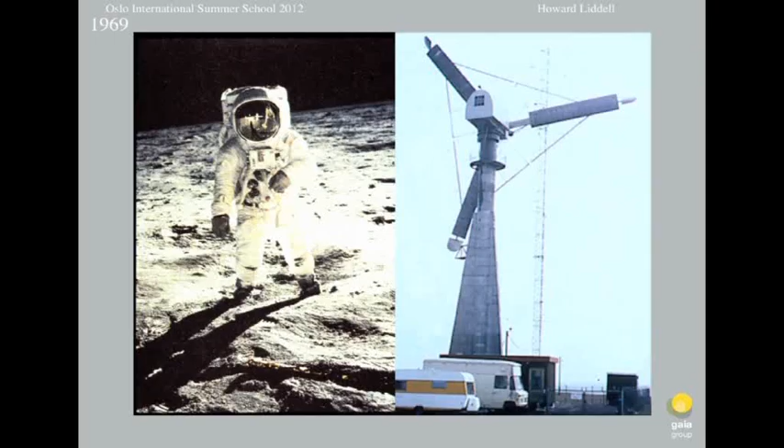If we start back in '69 with man on the moon, a great future was foreseen for space travel. The space people were in the big offices, and somewhere down in the basement was somebody doing wind turbines. The future of the world was definitely in outer space rather than inner space. This is actually the Gedser mill, one of the first major grid-connected mills, at the south end of Denmark.

And here we are in 2012, and what has actually happened is no men on the moon and millions of wind turbines. So the future's turned out somewhat different from the way it was foreseen in the days of Dan Dare and the Eagle comics of the 60s.

We are in fact in a much more earthed world as opposed to a space-borne world. In those days, as I explained in my previous session, we were zooming out to do stuff. We had this global perception of the world in crisis, and we were going out making these.

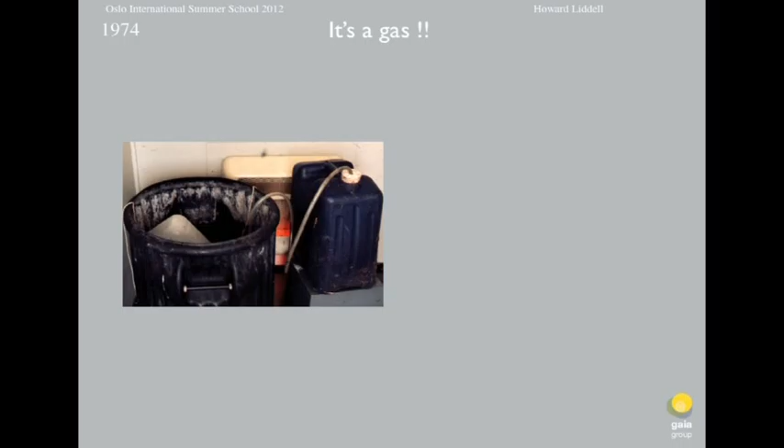These are all solar collectors and bits of kit that my students and I were making in Hull in the 70s. We were even using goat shit to try and make methane. In this tub on the left is goat shit, and the gas coming off is bubbled underneath into another bottle.

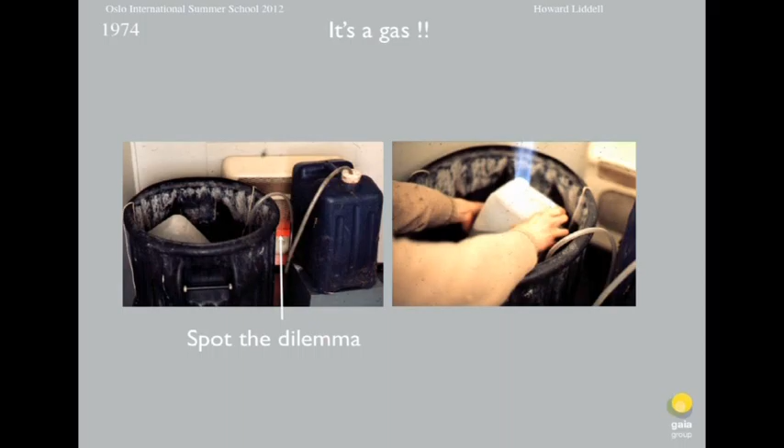Just to prove that methane comes off, there we are, we've burnt it. Isn't that wonderful? Except for one little problem - spot the dilemma. In order to keep the goat shit at the right temperature to generate methane, we had to put it next to a gas fire. So unless you actually want to engage in shoveling loads of goat shit, it's really an exercise in redundancy.

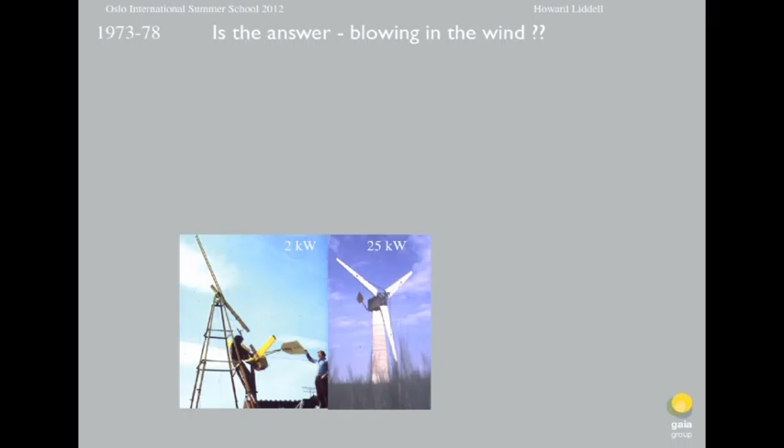A skinny version of me there, down on the bottom left, putting a wind turbine on the roof of our office in Hull, which actually generated just about enough to boil a kettle. An awful lot of effort for very little return, and that is one of the problems of micro turbines.

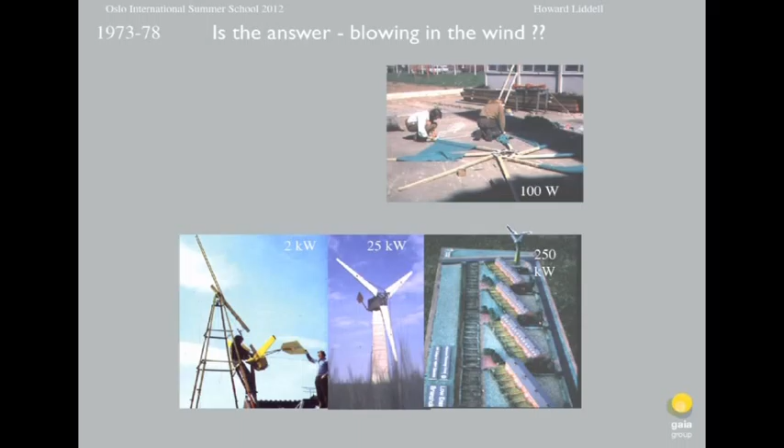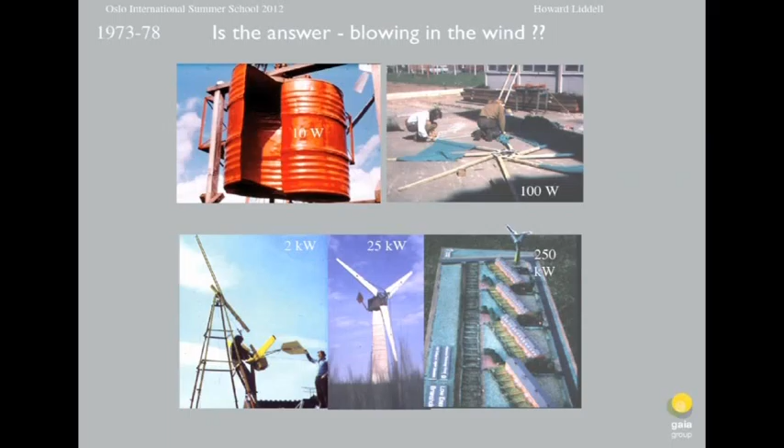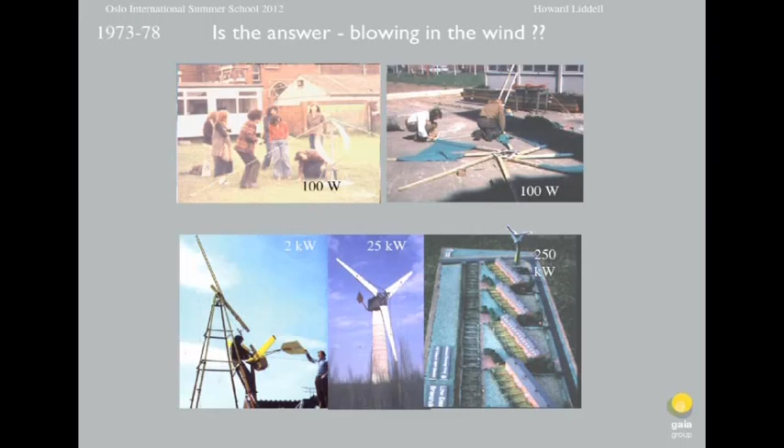But we built them - we built ones that were Cretan mills. We even had a project with a 250 kilowatt mill for a housing project in Hull, and then crazy stuff like the sawn-off oil barrel that generates all of 10 watts. The architect's favourite, the vertical axis windmill, because it looks sexy but actually doesn't work very well. So through the 70s we were doing lots of these things with all the pioneers of the industry at the time.

Now, wind forward a little bit. In the middle of all that, we were approached by Granada Television to get involved in a programme for refurbishing an old barn into an eco house. The architect was actually from Manchester, and we were there as what you might call academic support, talking through how we might get involved.

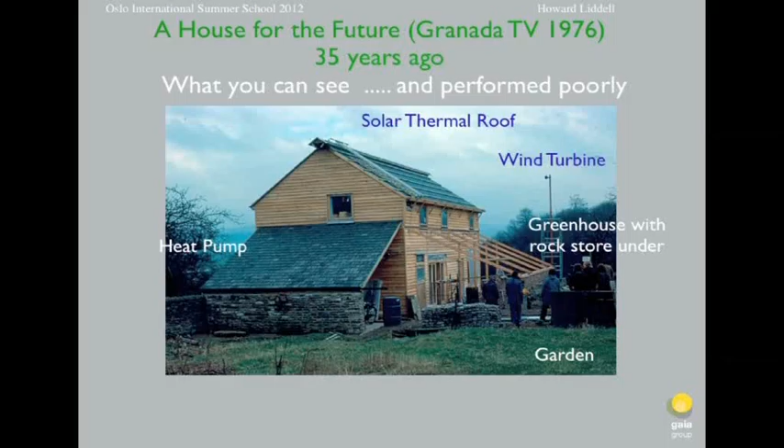All actually performed poorly. We went back to this project a year later and discovered that, in fact, the things that were working well were the things that you couldn't see: the high insulation, the draft-proof layer, and the kitchen heat recovery. Low-embodied materials also made a good score.

We learned then in '76 that what you can see doesn't always perform well, and what you can't see very often does. Therein lies the trick: if you want your green badges to show, you may actually not be successful. If you want them to be subtle, they may well be a lot more successful than you'd anticipated.

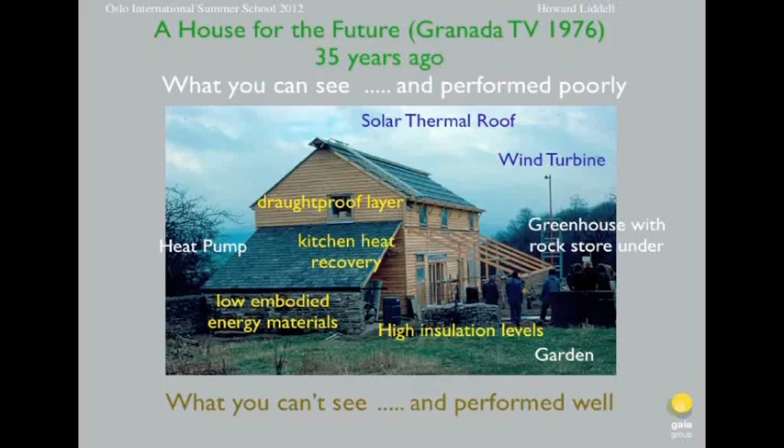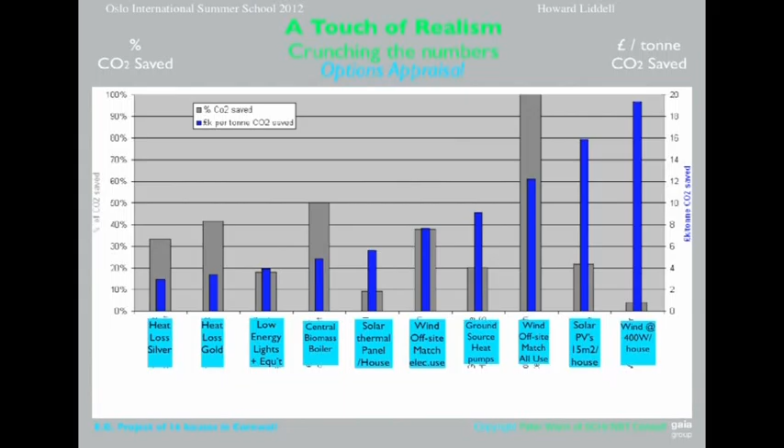What is amazing to me is that people don't actually crunch the numbers. I'm going to show you a project here where somebody did crunch the numbers for a project in England, a guy called Peter Warm, who looked at a single project and all the options.

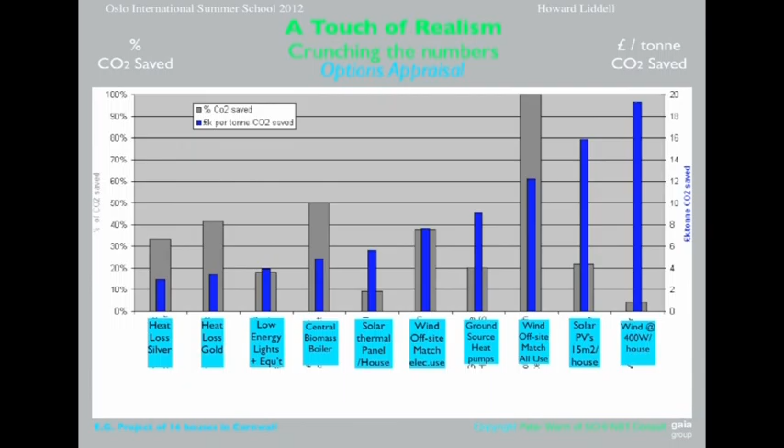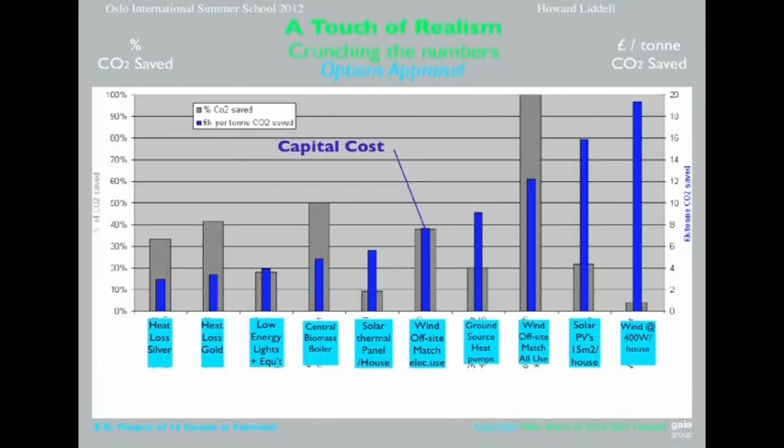On the left-hand side, getting the heat loss down to a silver standard, a gold standard, looking at low energy light fittings and so on, up to the far end where he was looking at micro turbines and then larger scale stuff. What we have here is a capital cost, the blue lines - the cost of any intervention proposed for this house in terms of pounds per tonne of CO2 saved. That's the investment cost to save money and carbon, and then the revenue benefit that comes from having spent that money.

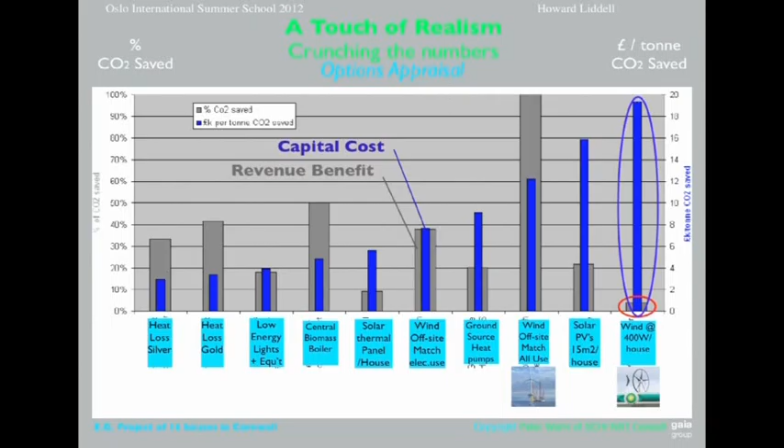If you look at the very right-hand side, what we have is a 400-watt micro turbine, which has a huge investment cost in terms of the tons of CO2 saved, and the output is tiny. If we look at the opposite, putting the turbine where the wind is, on top of a windy hill, what we get back is 20 times as much.

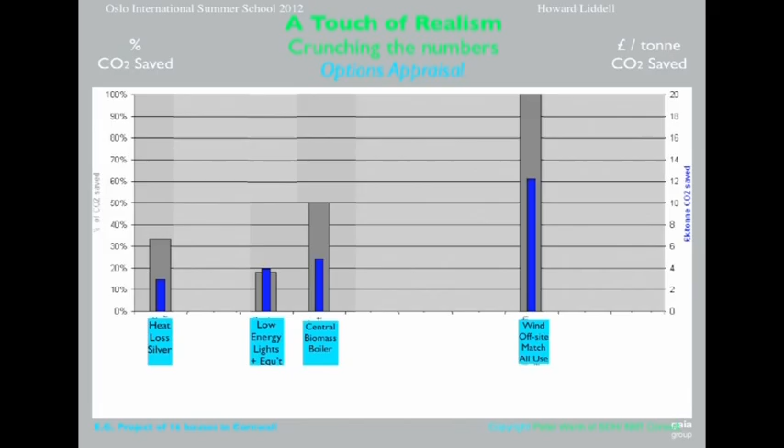That's perfectly obvious to anybody who thinks about it. We tend to place houses where there isn't any wind because we want to be sheltered. So it's pretty obvious that a turbine on top of something in a sheltered place isn't going to perform well, and indeed that's what happened. On the basis of crunching the numbers, certain things dropped out altogether as unviable, and others came on as very viable. So finally, through proper calculation, it was possible to decide what to go for.

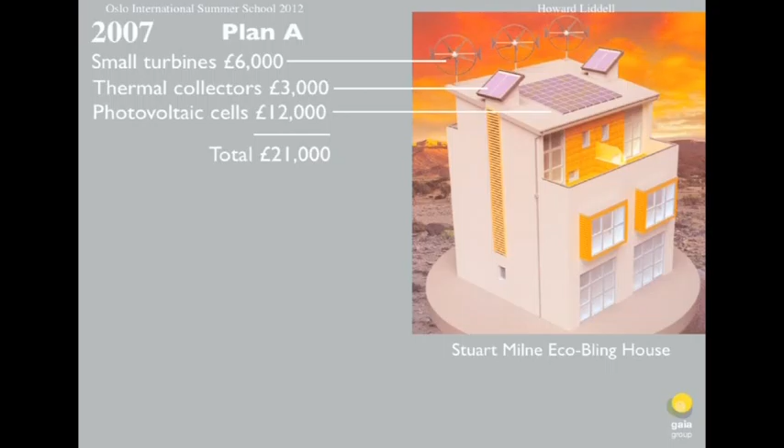Now, those who cannot learn from history are doomed to repeat it. So there we are in '67, and 40 years later, along comes a company called Stuart Milne, and they decide to make a house with small turbines on the roof, thermal collectors on the roof, photovoltaic collectors on the roof. They were going to spend an extra £21,000 to put all this kit on the roof. The payback period for that is about 100 years. The life expectancy of the technology is about 20 years. So I don't know what you think, but my view is that's not a very good investment.

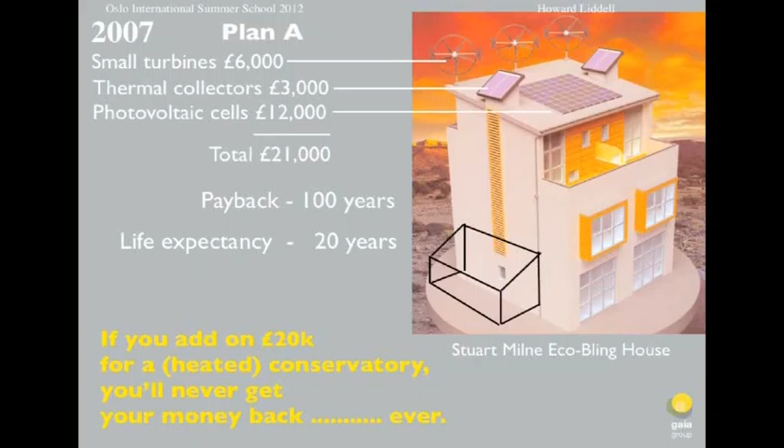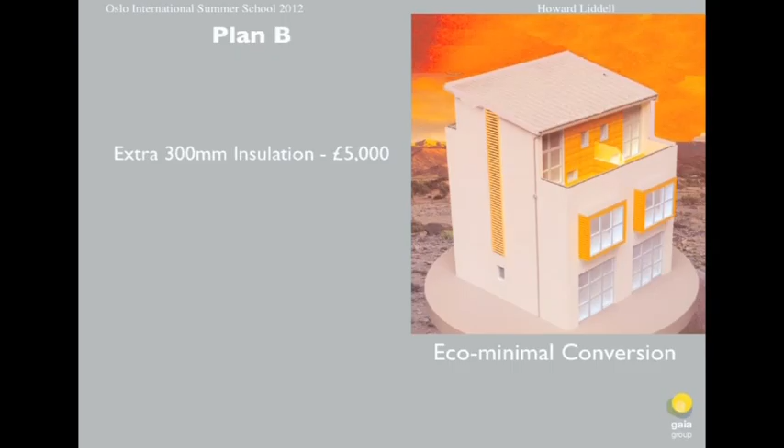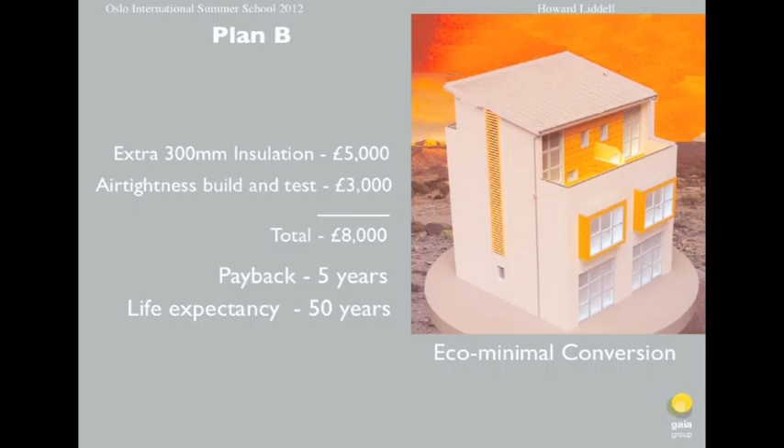Interestingly, in the UK it's turned out that 90% of people who put on conservatories also put heating in them. If you add £20,000 for a heated conservatory, you'll never, ever get your money back. So my version is Plan B, where we wipe all that off, take it all away, and instead add extra insulation and make sure it's draft-proof and airtight. That costs £8,000. You get your money back in 5 years, and the life expectancy is 50 years. So a factor of 9 difference in terms of cost effectiveness of the intervention.

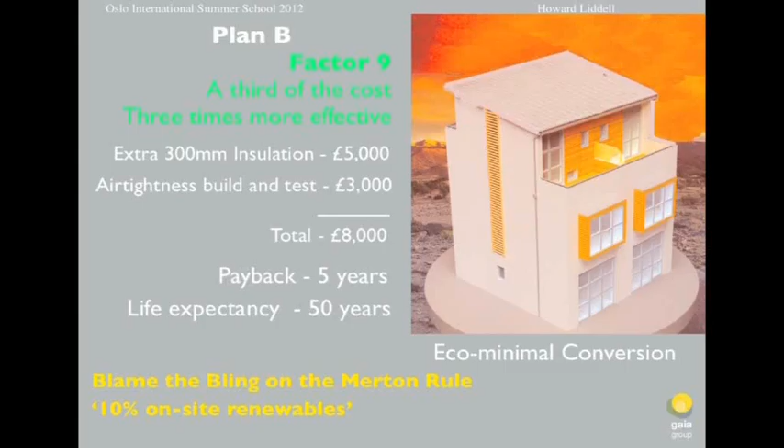Now, I was told by the quantity surveyor involved in pricing this project to blame it on the Merton rule. The Merton rule is Merton Borough in London has decided that all projects should generate 10% of their energy on-site - on-site renewables - which means we have wind turbines in the middle of London working off the exhaust from air conditioning from buildings next door rather than from the wind. Pretty disgusting, pretty stupid, and yet we're doing it.

This particular house was built - there you see it actually built, as opposed to the drawings. It was monitored, and what they discovered was the energy use was twice what was predicted at Passivhaus standard. The photovoltaic panels gave off only 74 watt-hours a day and were subsequently overshadowed, you can hardly believe this, by a new neighbouring building. Given that this was built in the grounds of the Building Research Establishment, and they had a choice of whether to put a building next door to it or not, that's a pretty astonishing decision to make.

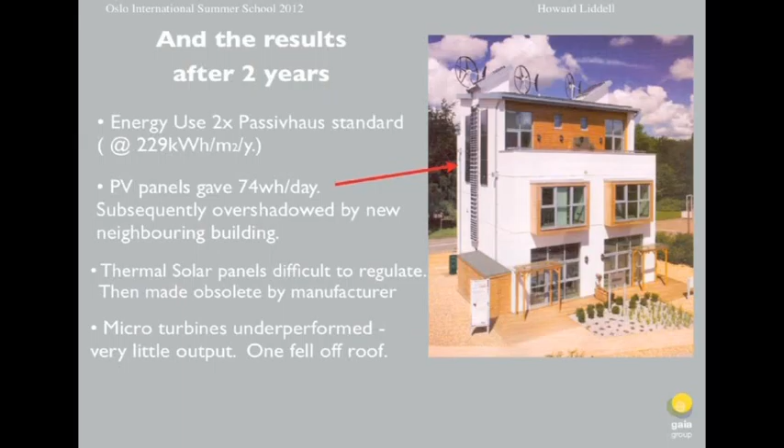The thermal solar panels were difficult to regulate, and then they were made obsolete by the manufacturer, so they were useless. And the micro turbines not only underperformed with very little output, but one fell off the roof. Again, not an unusual circumstance.

The occupants found the ventilation controls too complicated. Now, that is also extremely common, that the systems thought up by mechanical engineers are far too difficult to actually be simple to use. And opening and shutting a window is one of the easiest things to do, but they don't seem to be able to bring themselves to make technology at that level.

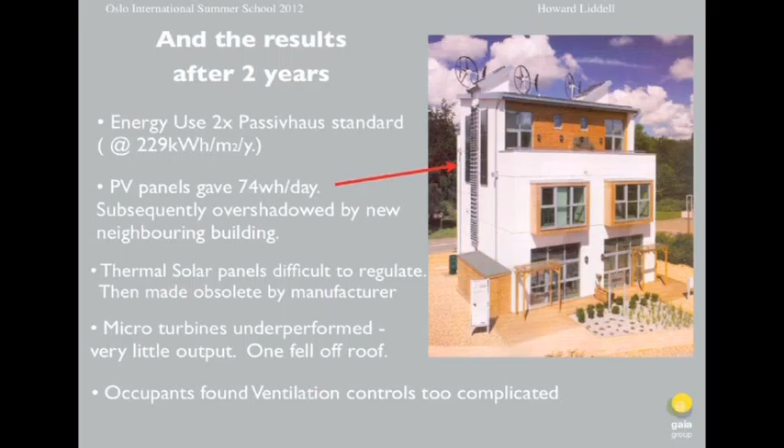So there we are. It's just become so silly, and yet we've waited 40 years to get back to a point where both of these projects are actually deciding that what we were doing in our practice 30 years ago makes sense.

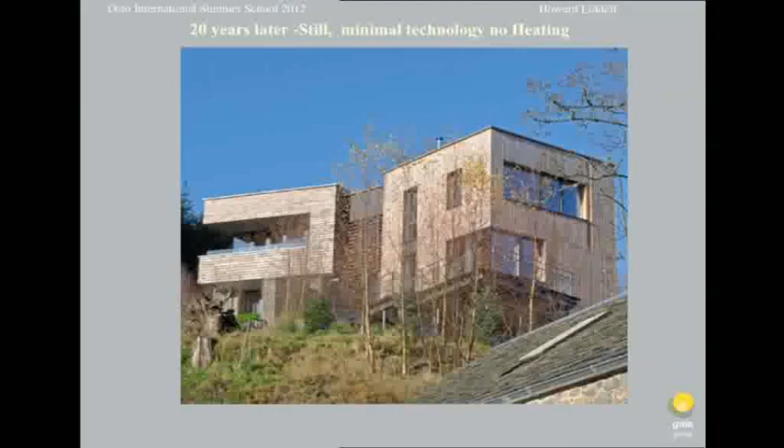This was the UK House of the Year in 1991, and I call it the birth of eco-minimalism, because the whole house basically worked off what was then a 5 kilowatt wood stove. And here we are 20 years later, still with minimal technology and no heating.

It's very straightforward, and I'm going to do it in the form of the 4 elements: earth, air, fire and water. I'm going to take you through, first of all, the things that I think don't work, and then counter those with something I think is a better strategy.

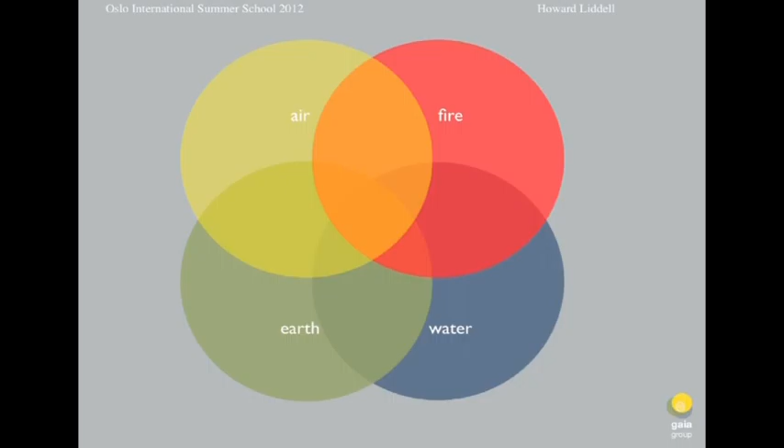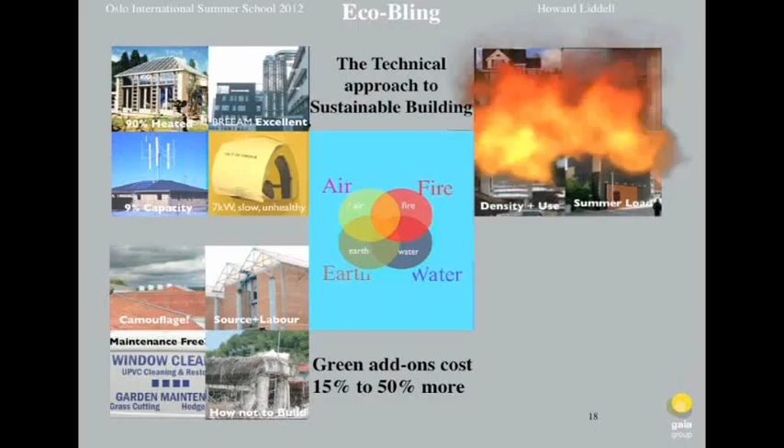So on the left-hand side, you will see - well, first of all, I'll go through the 2 scenarios. If we look at earth, air, fire and water, and we look at the technical approach to sustainable building, I can guarantee you that this approach will make the green add-ons cost 15 to 50% more for any project.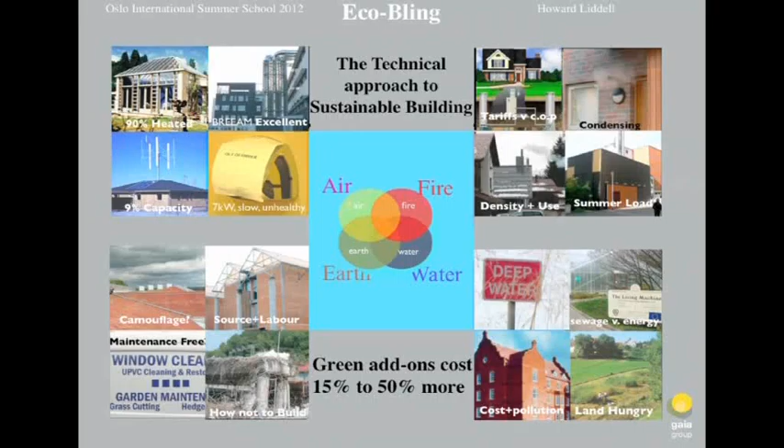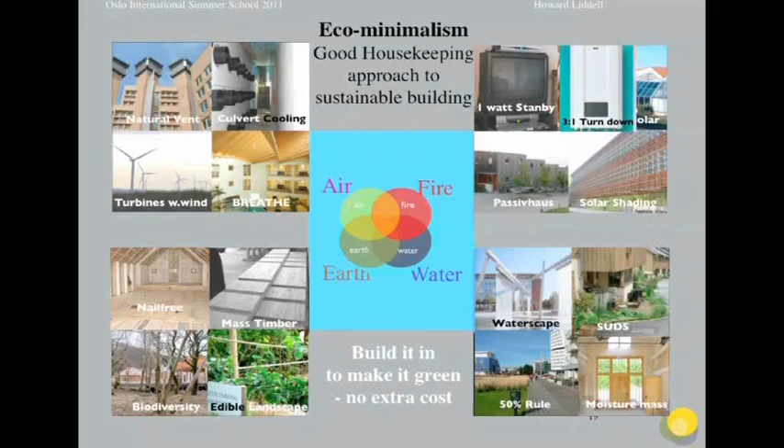If, on the other hand, you take eco-minimalism, a good housekeeping approach to sustainable building through earth, air, fire and water, you will find that you can build it in to make it green at no extra cost. And I know this from projects I've actually worked on where there has been no additional cost for the eco-interventions. So on the left we have eco-bling, and on the right we have eco-minimalism.

Let's start with number 1, which is fire. If we have photovoltaic cells, we find we can only get a 50-year payback period, and given that the degradation in these is 1% per annum, this is really fighting very hard to try and win back some energy points. On the other hand, we can save 10% of energy simply by reducing the impact on the national grid.

In the UK, 10% of energy is lost simply by having the standby buttons on televisions and other machinery. And we now have already the technology to go back to a 1 watt standby or even a 0 standby, and we haven't been using this.

Now, if we look at the possibilities of solar thermal, as against passive solar thermal, the problem here is not that it doesn't work, because it does work, and even a very simple solar collector can be made to work fairly efficiently, quite a cheap self-build. But in fact, the problem is that they tend not to be robust, and they tend to fall apart after about 10 years and then become redundant, meaning that effectively they have not paid back over their payback period. Passive solar, on the other hand, can be very effective.

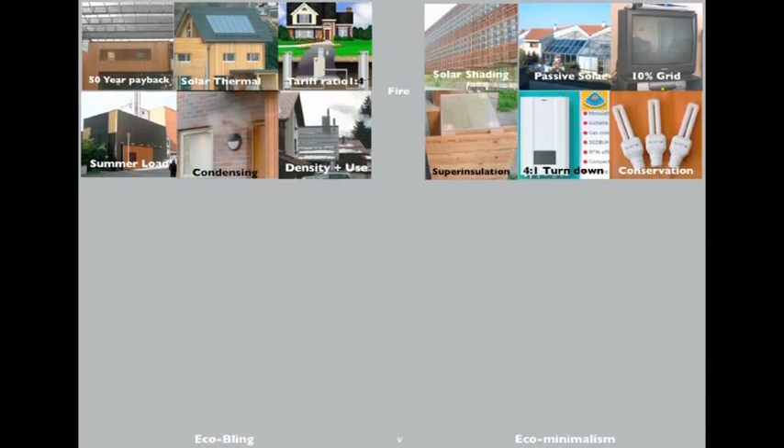As always, the best solution for everything is to go to super insulation and make sure that you don't actually need a supply side. You've already seen it off by reducing the demand. It's so easy, and yet it's so rarely done.

I've already mentioned the fact that if you have a conservatory, 90% of these get heating systems put in them. So although it's supposed to be free solar energy, in fact it works in reverse.

A much easier strategy for any building, rather than thinking about trying to get free heat from the sun, is actually to stop the heat leaking by drafts. Therefore all buildings should be airtightness tested.

Now again, I'm talking about Northern Europe, because that is where it is very important to stop the cold weather and the cold winds from going through the house.

I'm showing again this 1977 project, and it was an awful lot of effort to try and make a wind turbine produce heat, and in fact it really didn't work out. If you're going to really take wind seriously, that needs to be in wind farms and in intensity.

Engineers can take us to enormous lengths. This, believe it or not, is a BREEAM excellent building, and yet it's covered in exhaust systems and fans, and I really don't understand how that can be necessary when, in fact, we can do it in other ways.

We can deal with moisture and toxicity in this building called the Breathe building. I'll show it in the case studies later.

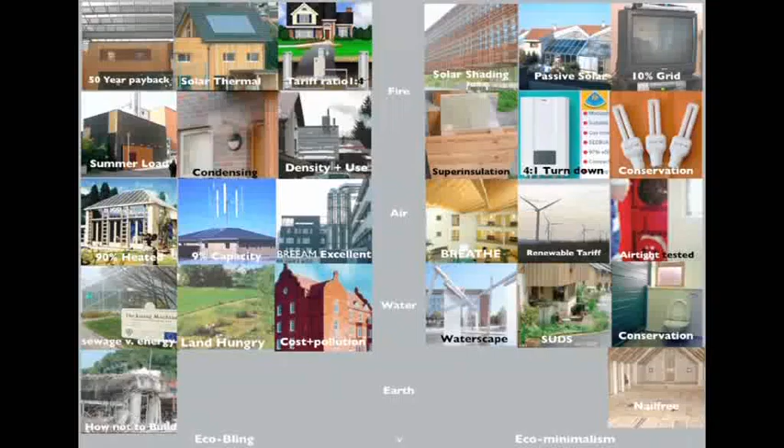And materials, how not to build. Don't build with recycled materials, but do build for materials that can be recycled. On the left, we have a motorway that's taking longer to demolish than to build, and on the right, we have a nail-free construction that can be taken apart without wrecking the timber. So it's two ways of looking at something.

Quite often, trying to use recycled materials is a very, very intensive activity, and you're just better off not going there. I have a problem personally with turf roofs and sedum roofs. I think they're an eco-camouflage, because very often underneath them is a plastic roof.

And if we're going to be looking at developing soft landscaping, then I think we should be looking at edible landscapes. This on the right is a car park that has apple trees growing between the parking bays. And we can look at all opportunities for actually making different species and productive species part of the urban infrastructure.

On the left is a building that's made out of rammed earth. It happens to be in an area where you get it very readily because it's in the south of France, in the Grenoble area. In terms of Scotland, what we're looking at more and more is what we have, which is timber, and mass timber in particular, because it has a terrific ability to mop up carbon. It's a carbon sequestrator. So these are the options when we're looking at two ways of looking at buildings.

One is we can go technology hungry, and the other we can go to passive interventions. So be careful of Mr. Eco-Bling, who's going to try and sell you the snake oil remedies, and look to doing it simpler.

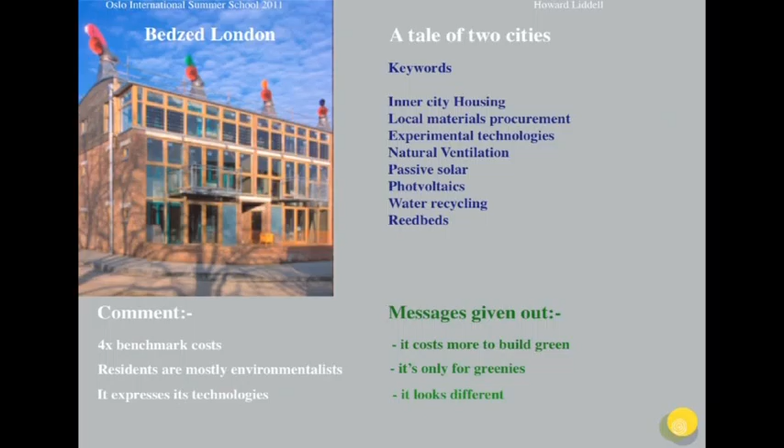And after five years of hearing hype and all the sales pitch, the architect has finally come out and said: next time, no moving parts. We've been waiting to say this for some time. But however, it's had a lot of publicity.

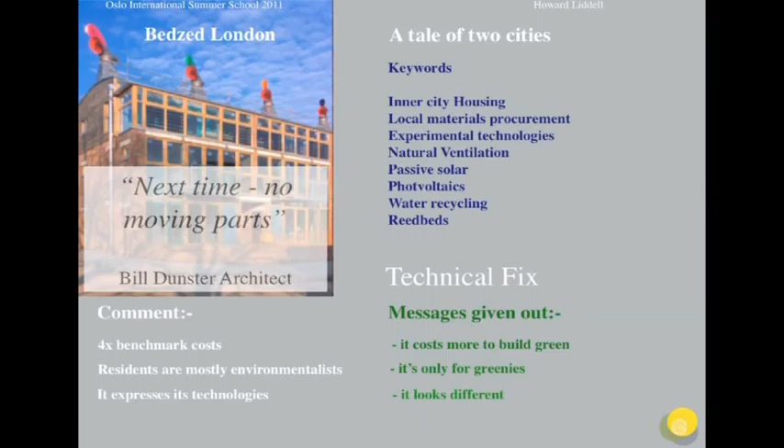In the meantime, other projects, such as the one I've shown you before in Perth, have their own agenda with healthy materials, natural ventilation, super insulation, air tightness, and so on and so forth. And it was built at benchmark costs - very importantly, at the same cost as a non-green project. Its residents are ordinary social tenants, and they shouldn't have to be greenies in order to be able to live in this project. Its differences are virtually unseen. So the message it gives out is that it can cost the same to build green, healthy buildings are for everyone, and it doesn't have to look different.

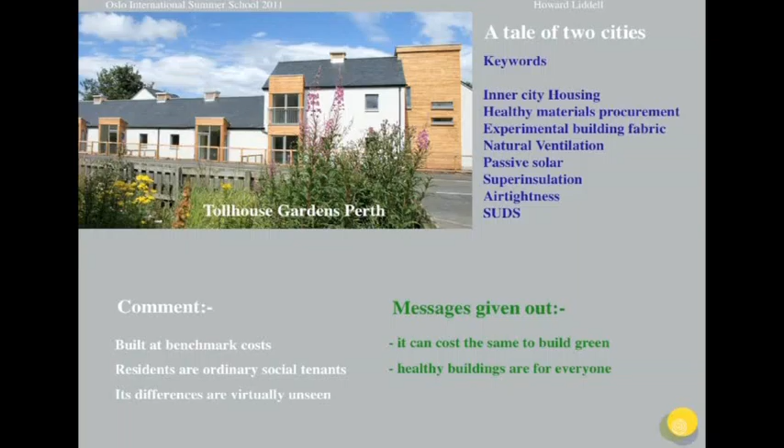And that's my eco-minimalist message - in other words, healthy buildings don't have to cost more than toxic ones. Now, I have been costing a lot of our buildings over time, and that particular one we built for £780 per square metre, which is the equivalent for housing in communities across Scotland.

I first learned my lessons in what to do and what not to do when I was bounced into a lot of technical systems where the mechanical and electrical services represented 30% plus of the cost of a recreation centre project I did in Scotland. I realised that conventional M&E specification - mechanical electrical specification - tends to be very overhyped. Everything is a factor of two more than it needs to be. When I did a project some years later where I had control, I actually did my own mechanical electrical design, a bit like a housing project, where I don't employ a mechanical engineer.

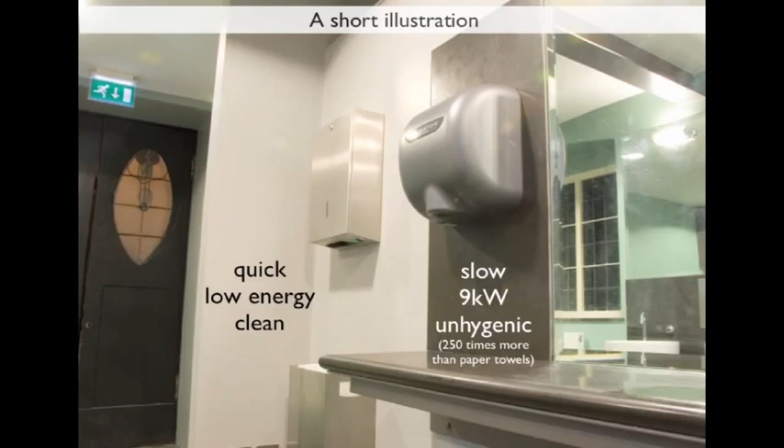I'm going to give you a short illustration that you'll know from your own intuitive use, let's say, something as simple as washing your hands in the toilet. Here we have a choice of a paper towel dispenser and a hot air blower. The paper towel dispenser is quick, low energy and clean. The hot air dispenser is slow, 9 kilowatts of energy, and it's in fact 250 times more unhygienic than paper towels. And that means hygroscopic materials are 9 times more effective than mechanical ventilation at dealing with moisture.

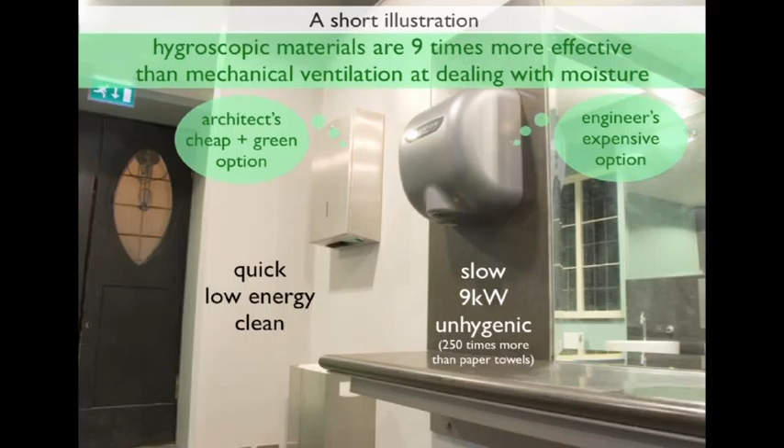Architects' cheap green option on the left and an engineer's expensive option on the right. I'll show you 2 buildings that actually show you that green specifications can cost less to install and less to run.

On the left we have the Breathe building I talked about earlier, and on the right we have the building where the engineer decided that it was all going to be run with lots of technology. In this, the Adnams Brewery building in the East Anglian area of the UK, what they did was they used materials that were highly hygroscopic, and in fact it was hempcrete - a mixture of lime and hemp. And they relied on the building materials to cope with the moisture levels in this brewery store.

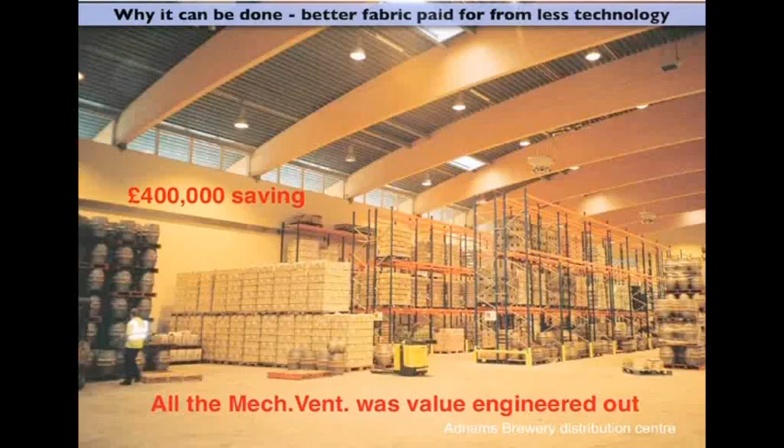The engineers had put in mechanical ventilation, which was actually £400,000 in cost. And the client says, well, if this system's going to work, it's going to work - let's just take all that out. And they did. They value engineered out the M&E. And in fact, it's been working now for 5 years perfectly well with no technology. So it can be done. You just have to know that it can be done.

And these are case studies in Germany where, in fact, only 1% extra for design and environmental modelling delivered 25% capital cost reduction and 50% energy savings. These are the Solarbau projects in Germany.

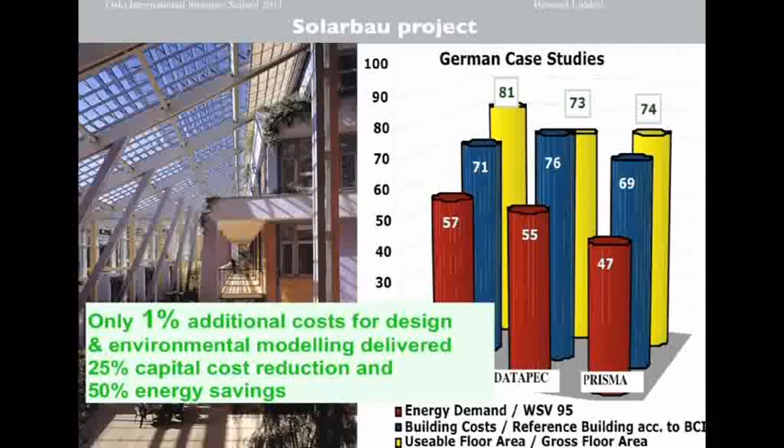To put that into a context of where your bang for your buck is, let's have a look at how we spend money on buildings. Capital costs need not be more for green buildings, but what about the running costs? Because if you're actually owning a building and running it, what does it cost to run? Well, let's say the construction costs are 1 unit. The building operating costs are 5 units, and the user's salaries are 200 units. So that means that really the construction costs are almost irrelevant by comparison, when the life of the building is in use - it's about the user's salaries.

Now, think about this, because if you have built a building where people don't like it, and they don't like it enough that they actually become absentees from work for a period during the year, then that's going to cost you. So if you get a designer in - remember a designer is only 0.1% of the construction cost - and that designer doesn't understand about indoor climate, you could have an impact on your users' salaries that's very significant.

For example, if there's a 5% improvement in attendance, i.e. non-absenteeism, that's 4 times the operational costs and 20 times the construction costs during the period of that building's use. All for the sake of spending an extra 0.1% in designing and modelling the indoor environmental quality in the first instance. And this is the sort of nonsense we get where everybody's paying peanuts and they're getting monkeys, and they're getting monkey buildings.

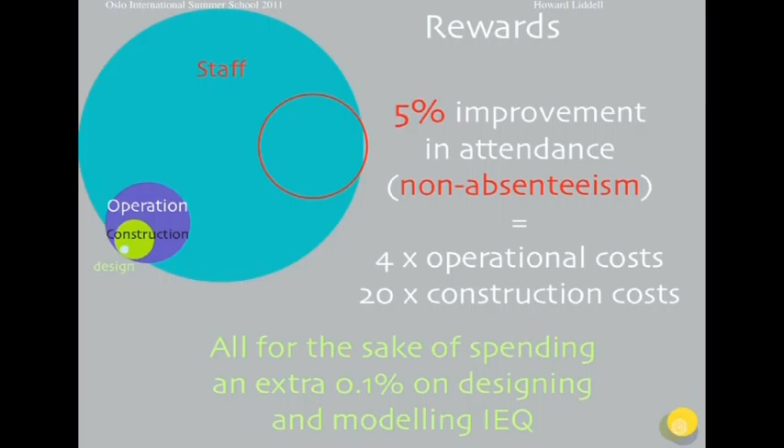In order to elaborate on this, I'm going to show you 4 of our buildings where we have applied these principles and been successful in delivering buildings that are fit for purpose, cheap to run, and sustainable. The Glencoe Visitor Centre, which we built in 2002 and won an international award for, was replacing an old campsite and an old visitor centre.

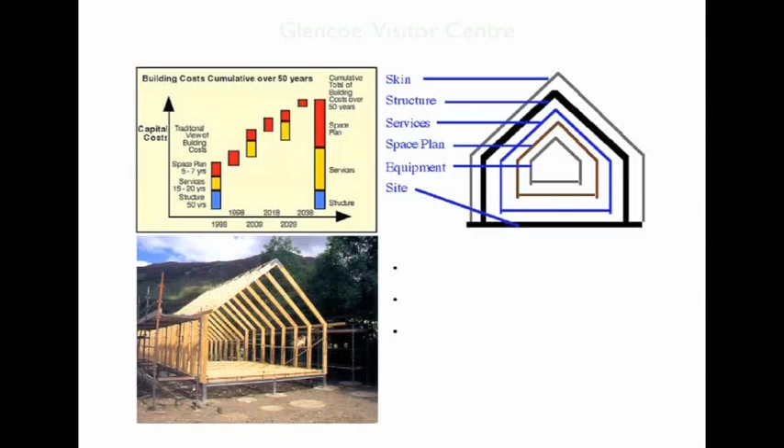We did it on the basis of the different elements of the building, like the skins of an onion, using different timescales so that we looked at the relevant costs. For example, the structure will last for 50 years, the services on average 15 to 20, and the space planning only 5 to 7. When you add that up over 50 years, the structure is a very small part of it; the space planning and services end up being the expensive part. So if you build a passive building, you don't have to spend on those bits over 50 years. Get that right, and you're saving a huge amount of money.

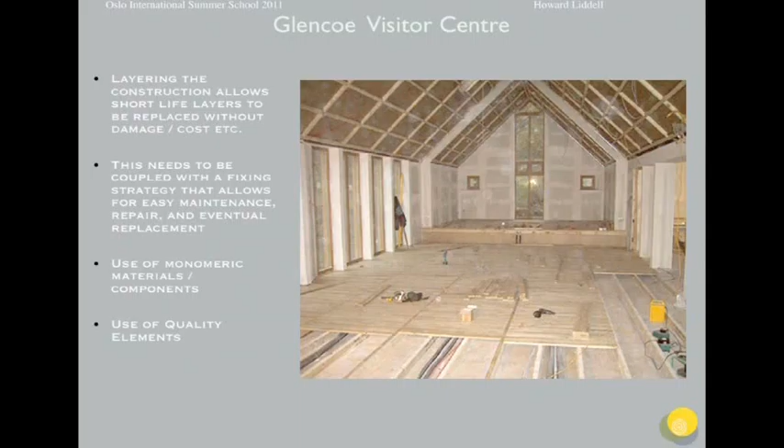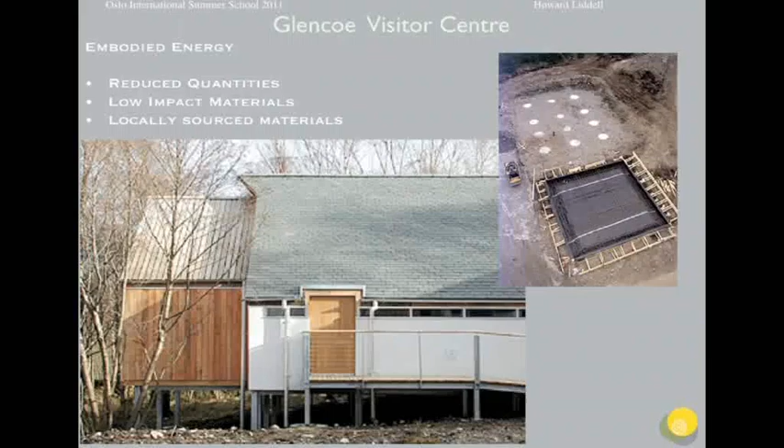We built this so that we could lift the floors and replace them using a nail-free construction. You can see the plumbing and electricity going under the floor there, and those boards can all be lifted free. We took a long time to make sure the infrastructure for the plumbing was as efficient as possible and reduced the treatment plant by a quarter. We had low impact foundations so there was a light footprint on the ground and not lots of concrete.

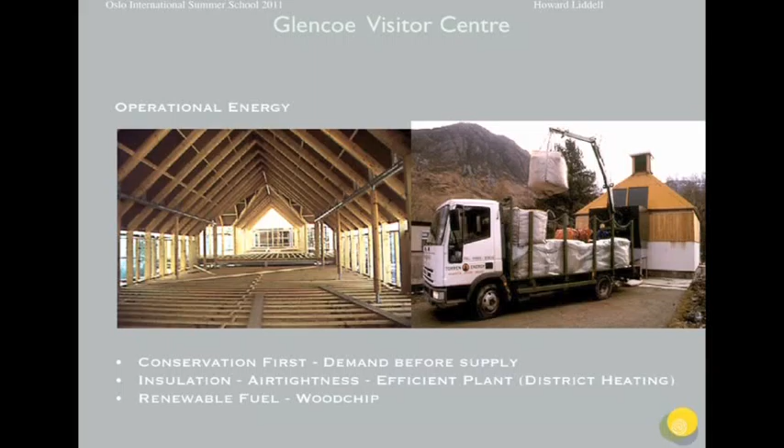We were also looking at operational efficiency as against actual generation. As it happens, we were using wood chip for the heating system here. It wasn't a totally passive building, but it was extremely efficient. We sourced all the timber locally, completely untreated, and about half of it was from independent suppliers. It was a combination of what you might call Scandinavian and Scottish traditional architecture in juxtaposition with each other.

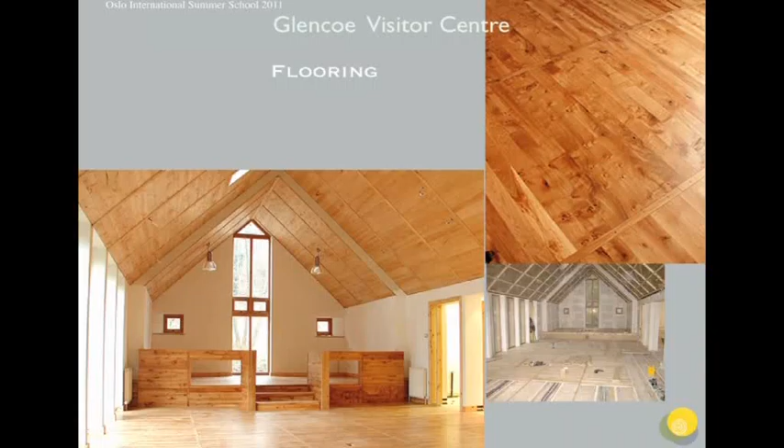Here's some of the flooring—you see the detailing there—and it's a mixture of timbers, from beech to birch to oak to sycamore. That was probably at the time the lowest impact building we had ever done, and it stands up to scrutiny throughout Scotland.

This is a project we did with Rotherham Council, where we were advisors for the ventilation system—and in fact the lack of a ventilation system, because we used hygroscopic materials. We did all our specifications for them, and the building was built for people with breathing difficulties: miners and steel workers who had pneumoconiosis and various other diseases, so it had to be right.

We modelled it, and managed to deliver natural ventilation using thermal mass as well as moisture mass. We had an underground labyrinth to preheat the air in spring and autumn and cool it in summer, so we didn't need an air conditioning system. The air is extracted at higher level windows, fan assisted at high external temperatures. In winter, ventilation enters at the atrium roof level in a mixing mode. So we had a hybrid system here.

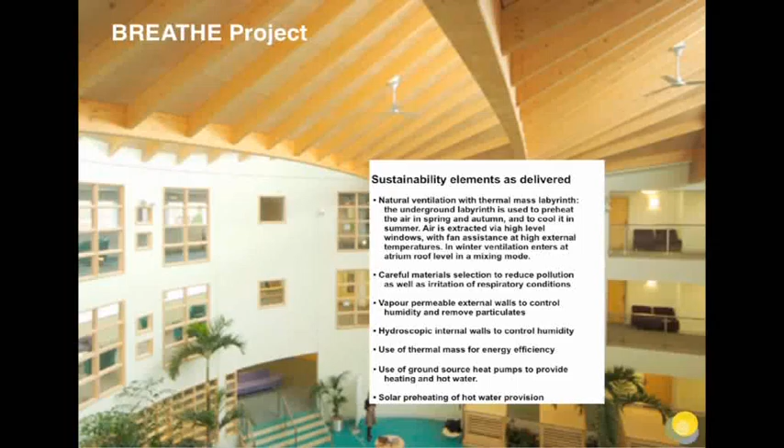We carefully selected the materials, and I was the advisor for that. The vapor permeable external walls control the humidity, and the thermal mass was used for energy efficiency. So it was a passive building, and it's worked incredibly well. Its cost was about £2,000 per square metre.

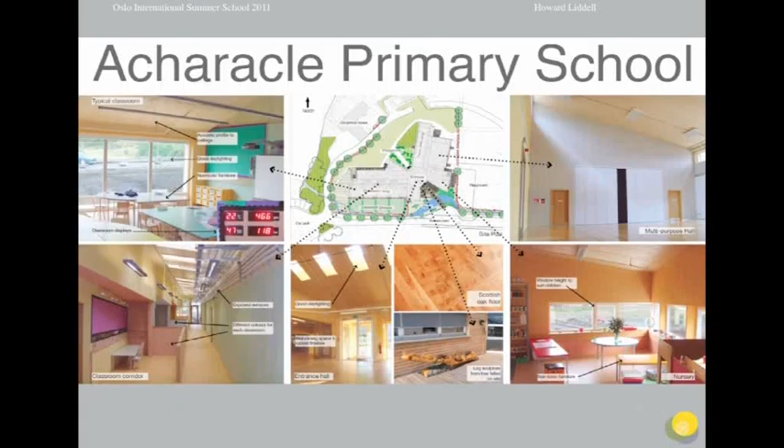Finally, or nearly finally, I'm going to present the Acharacle Primary School, which is a building we completed 3 years ago, and which again we pretty well did every trick in the book on. We used mass timber—it's the first mass timber building in Britain to sequestrate carbon. It's a passive house guarantee.

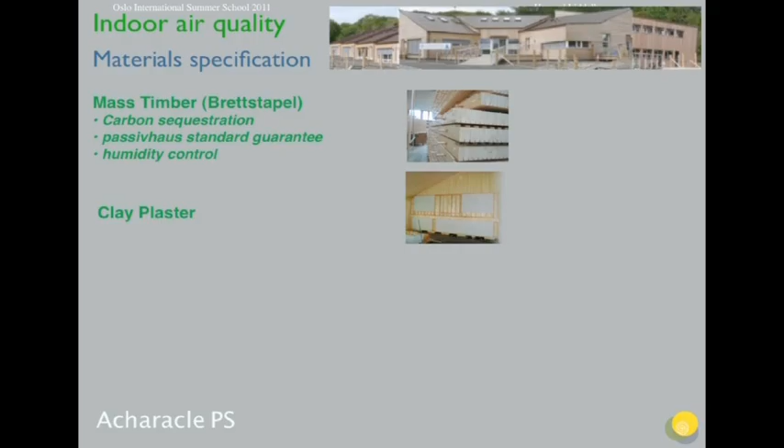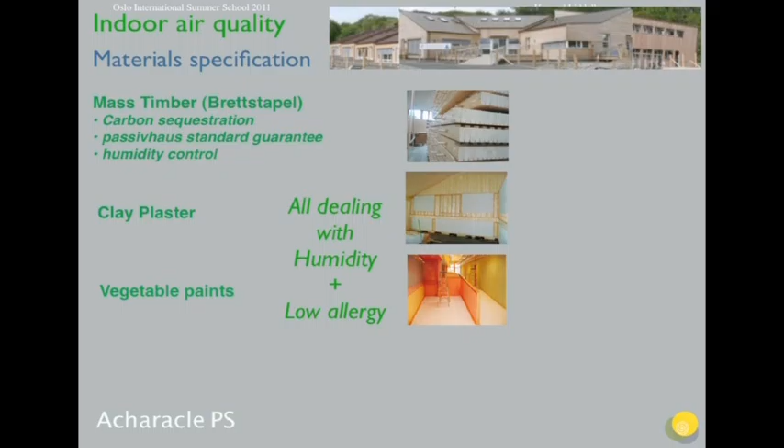We had humidity control through this and the clay plaster used in the classrooms. The paints were vegetable paints, so any moisture going through the walls—it was open porous—and all of these dealt with the humidity and low allergy requirements. We also commissioned specially healthy furniture, because surprisingly there is no furniture made for schools in the UK that actually has healthy finishes. So we had this specially commissioned with special paints and low allergy off-gassing, unique to this project, and we're very much supporting this manufacturer in the future.

So basically, on the basis that hygroscopic materials are 9 times more effective than mechanical ventilation, we were able to remove the mechanical ventilation, normally a prerequisite for a passive house building.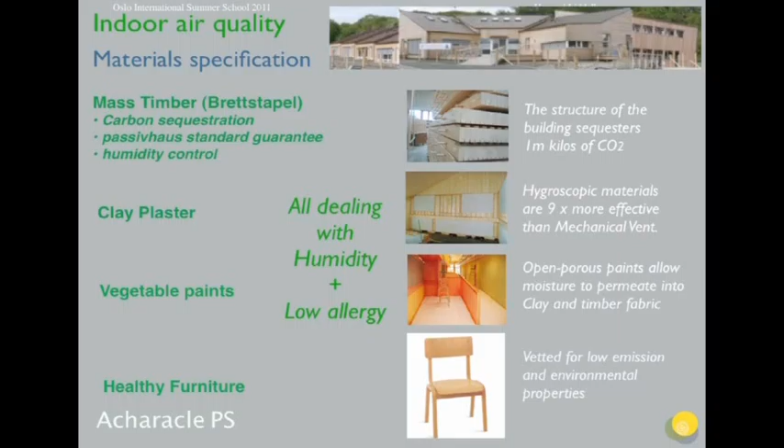The open porous paint allowed the moisture to permeate. It was vetted for low emission environmental properties with the furniture, and the structure of the building sequestered 1 million kilos of CO2 and cost us a mere 50,000 kilos to get there from Austria. So basically we're on a winner here.

The indoor air quality, we went through all sorts of different ways of looking to ventilate it, and all these options were modelled and reviewed. We even had a culvert system at one point, but decided to keep it simple eventually, with just simply openable windows that worked off the temperature and the carbon dioxide levels.

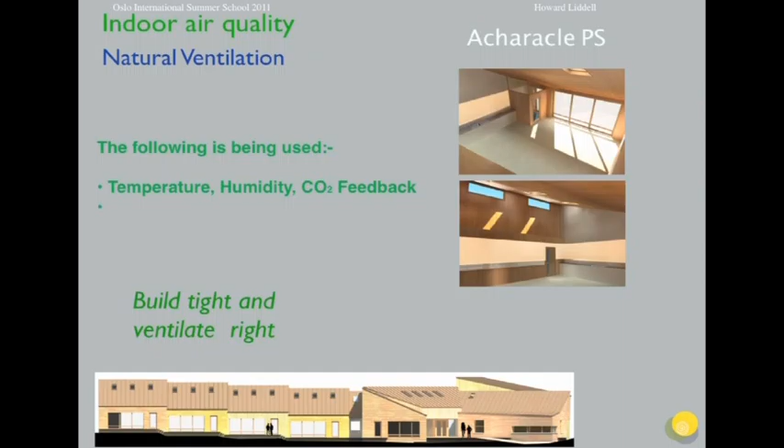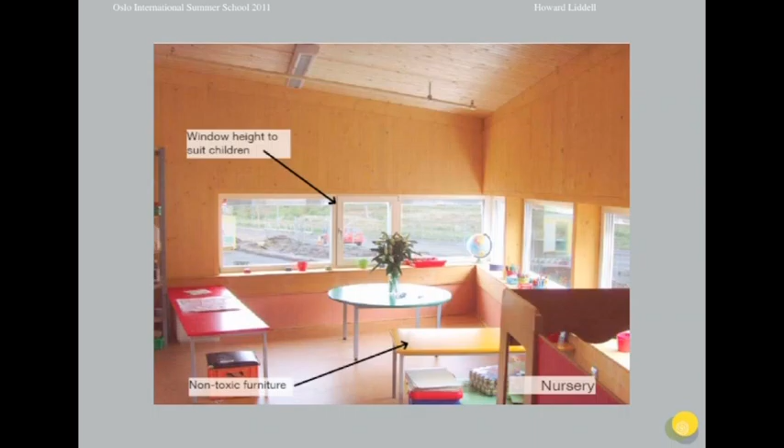So we eventually went for this natural ventilation system, and the following is being used: temperature, humidity and CO2 feedback, remote Velux operation for the window master, lobby door cranking in summer. And in the nursery school, we've made sure that all the window heights suit the children, furniture is non-toxic, and the nursery is again done in a child-friendly manner.

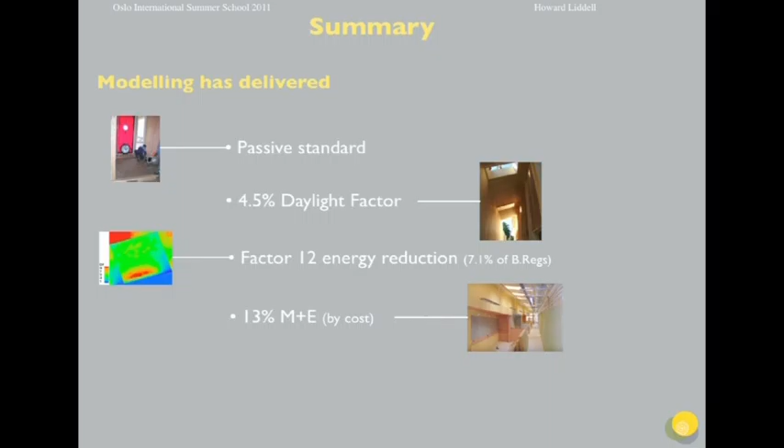So, in summary, the modelling of this project has delivered a passive standard, a 4.5% daylight factor, which prevents them from having to put artificial lighting on during the day, a 12 times energy reduction above building regulations, and we got the mechanical and electrical costs down to 13% by cost, as opposed to what would normally be 30%, because we did all the modelling up front and worked with the engineers up front to make sure that we didn't have to over-specify the mechanical ventilation.

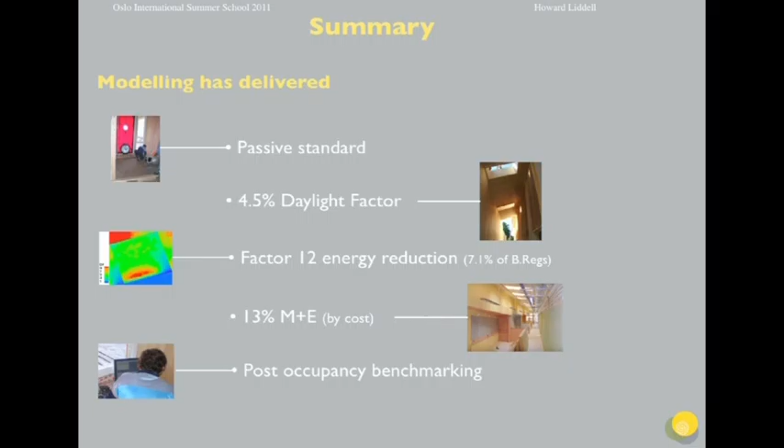We have post-occupancy benchmarking, which means that we can check that this building is doing what we said it would do, and over 3 years now we've monitored it, and it is performing as we wanted.

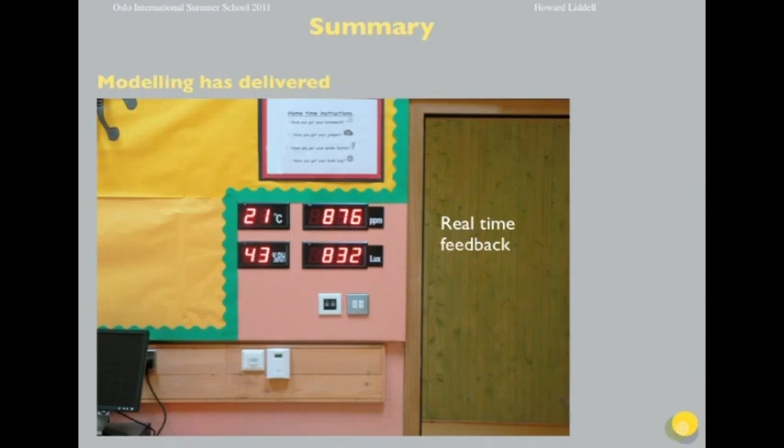Within each classroom are feedback mechanisms that the children and teachers can read all the time, which gives the temperature in the classroom, the relative humidity in the classroom, the parts per million of CO2, and the lighting levels. So they get real-time feedback on what's happening in the classroom, and they know whether they're comfortable or not by the dials on the wall as well as their subjective feelings.

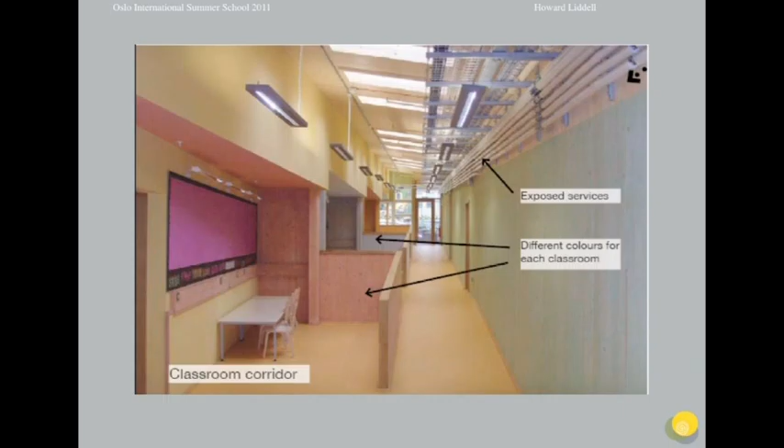Within this, we have deliberately exposed the services in the corridor so the children can see how things are getting about the building. We have different colours for each of the classrooms so that they can feel that they've got their own space with their own colour scheme. And the classroom corridor, which is on a slope, allows for outside library use outside each room. Again, that was agreed with the client.

The colouring, you'll see here, we have what's called a lasure technique, which is a light brushing of natural vegetable paints, and the colour scheme was done by a specialist colour advisor, and each of these colours is related to psychological reactions to colour.

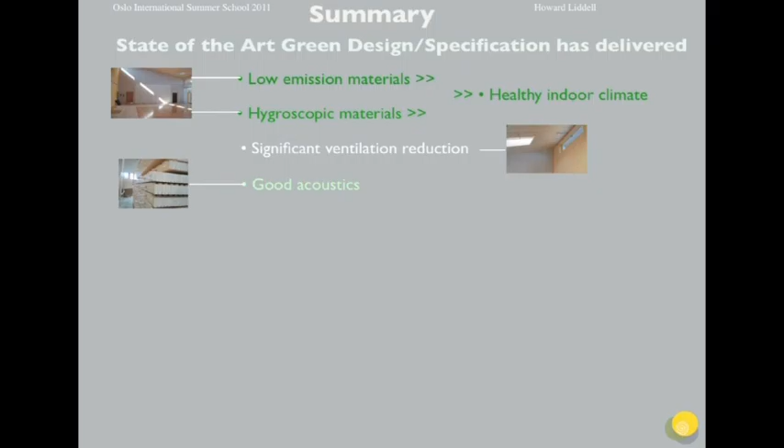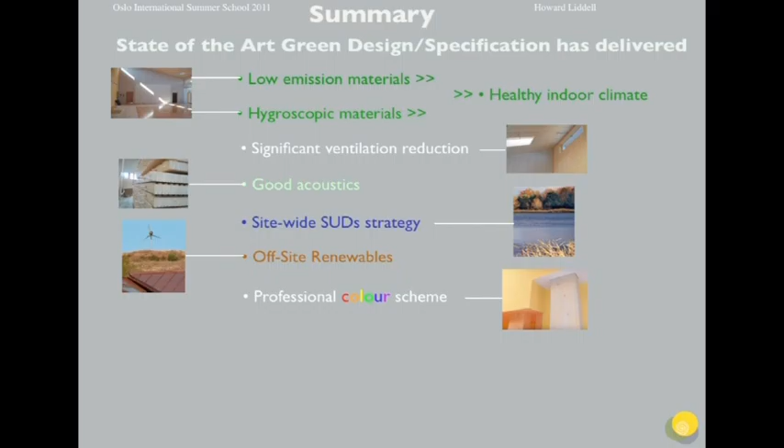So basically the summary of this project is that we've had low emission materials and hygroscopic materials to give a good healthy indoor climate. We've got a significant ventilation reduction, good acoustics, a site-wide water strategy. We've got some off-site renewables in order to be able to deal with the hot water loads because everybody has to wash their hands, a professional colour scheme, new zero-emission furniture, and 1 million kilograms of carbon sequestration. So we feel this is a significant step forward in a holistic approach to eco-building.

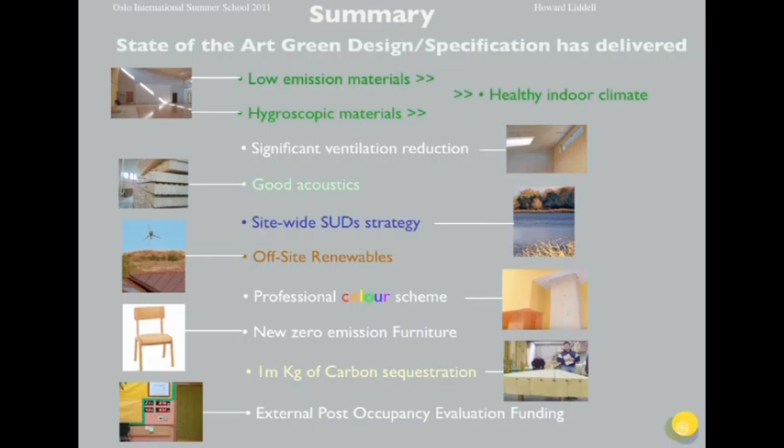And we managed eventually also to get external post-occupancy evaluation funding, which means that we can prove that what we set out to do has been done. A very important thing.

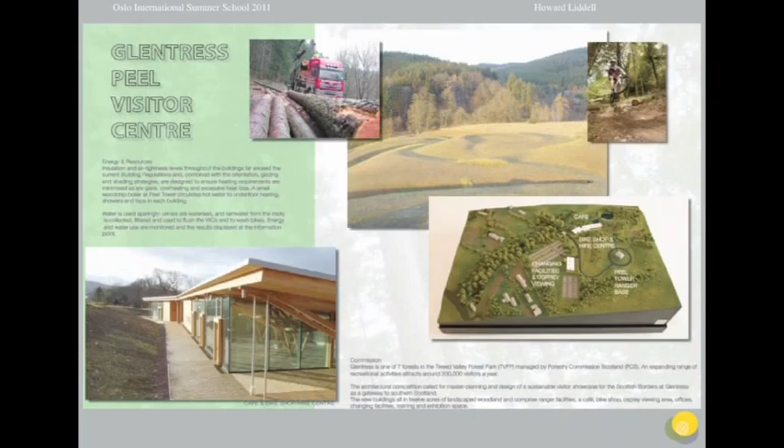And I'm really just showing our latest project here for no reason other than we've won some prizes with it. We think it's rather nice, and it happens to be our latest project. So it's again an essay in wood and glass and eco-building.